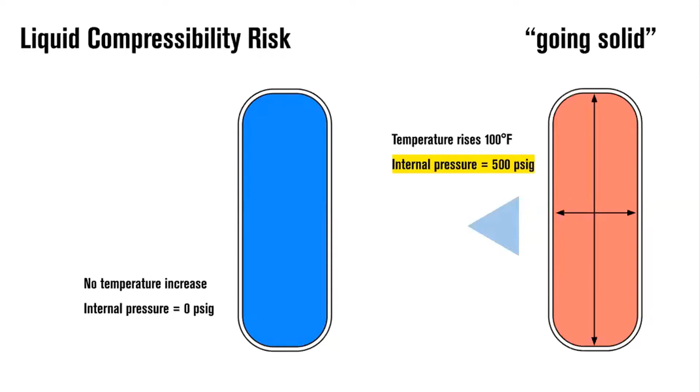So in a couple of sentences, that's what Three Mile Island was all about. They were afraid of going solid. Okay, so that's kind of on a huge scale, but nonetheless, it affects us. And the question is how? Well, let me save my cursor here. In three ways. We're going to look at just a typical Plan 53A, we're going to look at a 53B, and we're going to look at a 53C.

Now, all of our customers are trained to fill this to the normal liquid level before they start pressurizing it. There have been cases where customers say, I don't want to come out here and refill this when the seal's leaking, so I'm going to just fill it up all the way. Okay, if you fill this up all the way, you have now gone solid. And once you valve all this in, if you increase the temperature of the liquid in here, even by a little bit, the pressure inside this vessel will start to rise, and it will rise in an uncontrolled way. And yeah, the pressure gauge is going to tell you it's rising. The problem is it's going to rise very quickly.

And so what is the heat that causes this fluid to expand? The heat is typically what we normally see in seals, and that is seal-generated heat and heat soak. Now, you probably wouldn't see an increase of 100 degrees Fahrenheit that leads to that 500 PSI condition, but it would not be unusual to see a 10, 15, or 20 degree rise, and that's going to create quite a hydraulic pressure and stresses in these walls, and conceivably you could exceed the MAWP of the reservoir and cause an unsafe condition.

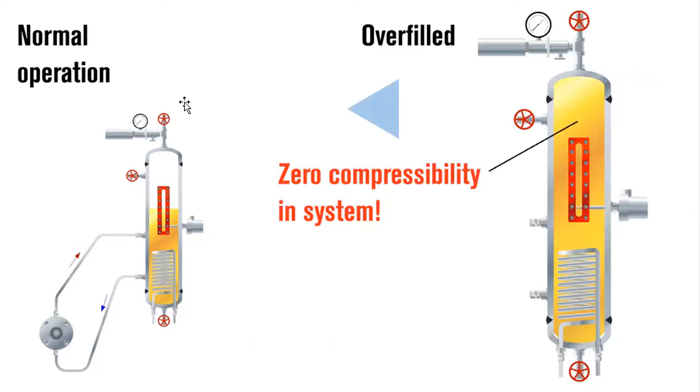Now, what can happen is over time, these bladders can get kind of brittle. If you're pressure cycling them and changing their shape often, you can get little tiny pinholes in them. And that means over time, you can lose the precharge. This kind of looks awful here, but if you lose this precharge, then you have done what? You have gone solid. And that means you have no compressibility in the system. In this case, if you were to heat up the barrier fluid in the whole system, you could start to develop pressures that were unpredicted and unpredictable.

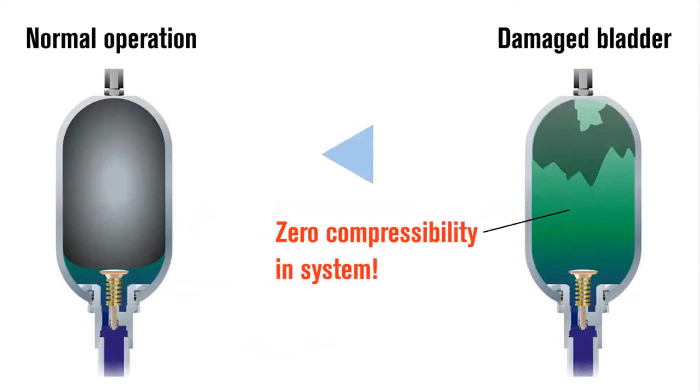So that's something that you definitely want to watch out for with Plan 53Bs, because a lot of customers don't understand how they work. And of course, you can't see through them. You might not even know that a bladder's there. Some customers think when you inflate that bladder, you're actually pressurizing the barrier fluid as you do it. That's not true. What you're doing is adding some compressibility to the system.

Final case, this is a Plan 53C. We don't use a lot of these, but there's a lot out there. And they're often used in fairly critical services in smaller pumps. Some ANSI pumps have pressures that really vary over time for the process. We want a barrier pressure that's not at a singular high value, but a barrier pressure that tracks that process pressure. And we do that with this piston multiplier. We call them a DRU.

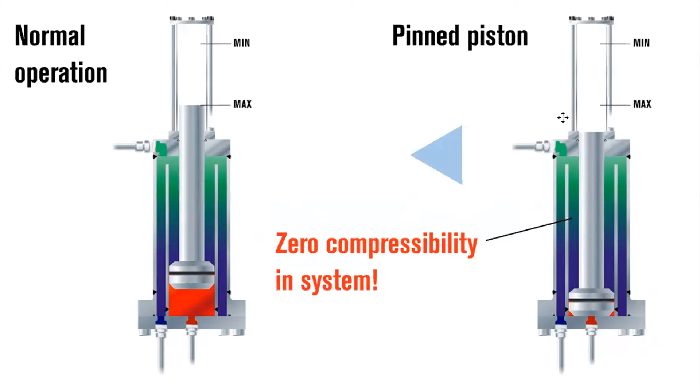But again, please don't think this is a way to create barrier pressure by overfilling something and then heating it up. I hope that makes sense. So what you want to avoid is zero compressibility in the system. I hope you understand some of the physics going on now.